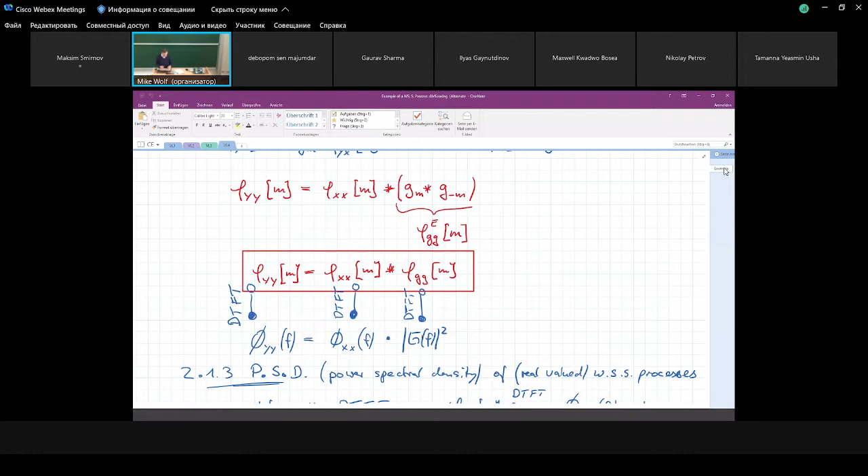And then we said, okay, we just introduced here this power spectral density. For this example, AMI, I've done the discrete time Fourier transform of the autocorrelation function and obtained the power spectral density. Then we discussed the characteristics.

And today we switch to discrete time stochastic processes. As long as these processes are real valued, there's no difference in the characteristics. So the autocorrelation function is an even function. This is very helpful because if you calculate the value at a given time shift m, you don't need to calculate this at -m if you know m, for instance. This value is always an even function. Of course, the autocorrelation function for real processes is real, and the power spectral density, because if this is a real function, the Fourier transform is always also an even function.

The difference is, of course, if you have discrete time signals, the Fourier transform is periodic. So it's not surprising that this is a periodic function. And of course, if you just insert numbers to obtain a frequency description, here you can't see any time, the time index m, or any frequency.

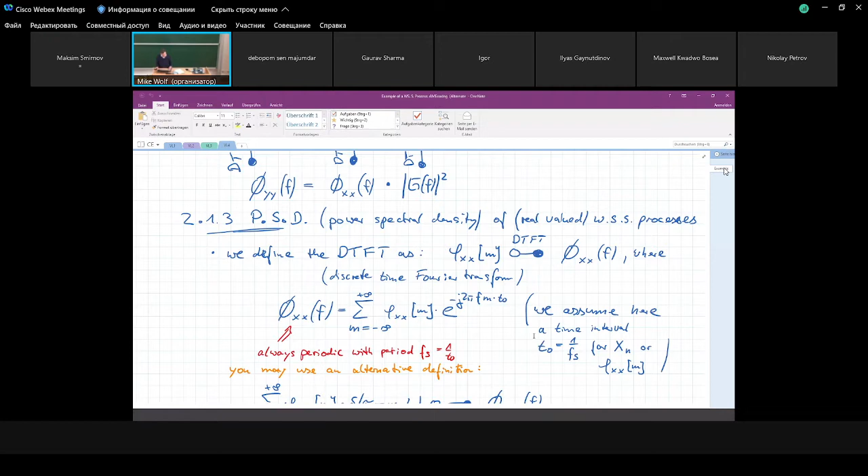Often you don't see this t-naught here, or the fs term. If you say, for instance, fs is 1, then this is just 1. But it's important to note that this point always corresponds to the Nyquist frequency, half of the sampling frequency. If you know the spectrum from 0 to the Nyquist frequency, you know everything, because this is an even function, and the rest is periodic.

So in MATLAB, for instance, if you have a discrete time signal and obtain the Fourier transform, usually you plot it only from 0 to half, so to the Nyquist frequency, because all the information is there, since we've shown that the spectrum is periodic.

So the total power is basically contained there, but you have to take care: the total power is not the integral over the power spectral density from minus infinity to plus infinity, because this would correspond to an infinite value. This would be possible, by the way, if we replaced this discrete time autocorrelation function with a sampled autocorrelation function using delta pulses.

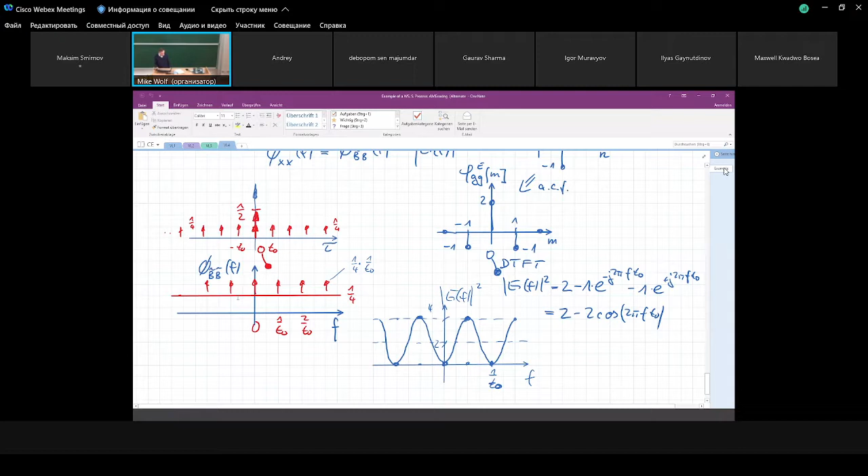So we learned already that if we know the power spectral density or autocorrelation function at the input, and the system description, the impulse response or transfer function, we know also the power spectral density at the output. We ended up with this example: how could we obtain this alternate mark inversion? We said we could do differential encoding of the bits and then take the difference of two neighboring bits. We started with this example last lecture.

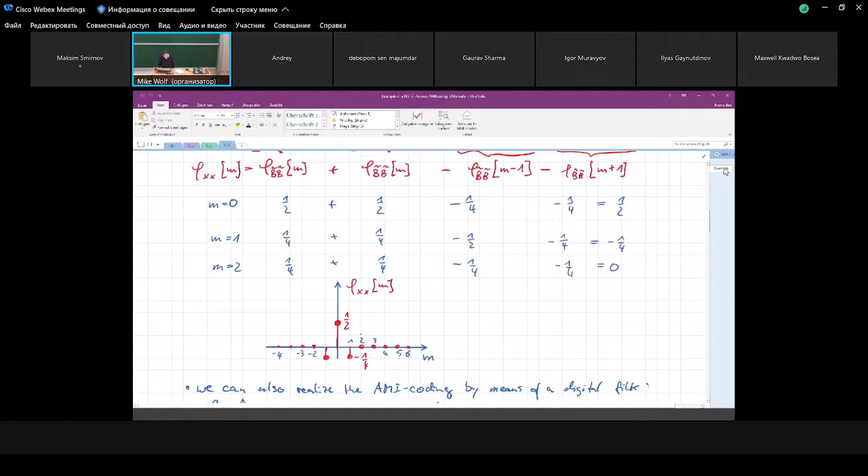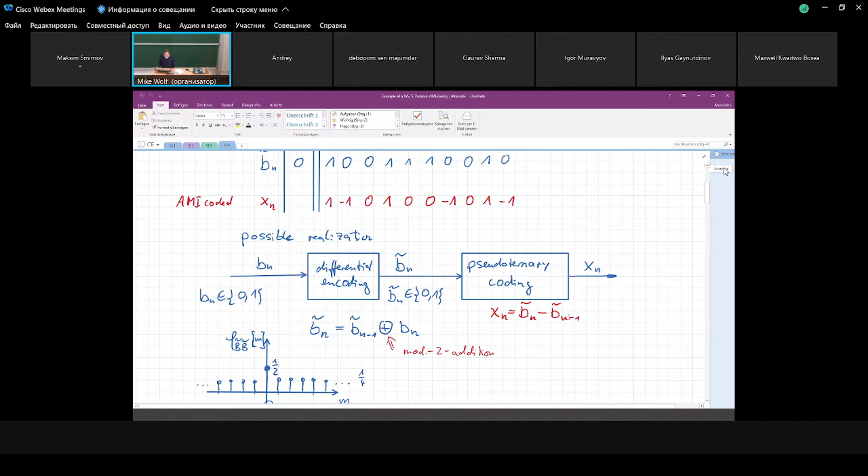There was this description: these are the differentially encoded bits, and this can be realized by a filter. I take the actual differentially encoded bit and subtract the previous one to obtain a new symbol, xn. So this is a filter, realized as such, and the impulse response, or correlation function, of this filter would look like this.

This is the filter impulse response. If I multiply Gn with Gn plus m and sum up, I end up with this for different m values, so an even function.

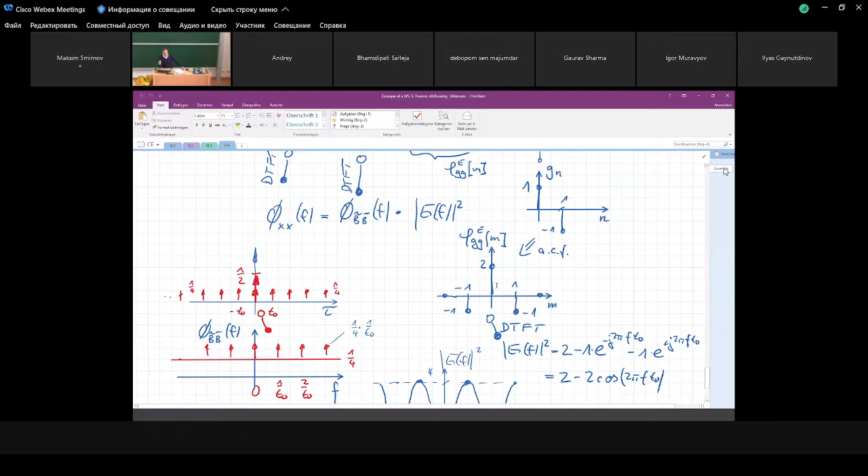So this autocorrelation function of the differentially encoded signal gives me the correlation function of AMI, but here we talk about power spectral density. So I could say this corresponds in the frequency domain to this G of f magnitude squared, which looks like this. And if I multiply this with the power spectral density at the input of this filter, I get the power spectral density of the AMI signal.

If you only take a look at the continuous part, it's a constant, since bits are statistically independent. But if I multiply this by the transfer function, I get again this sine squared characteristic, described by this filtering. The discrete components of the spectrum disappear completely because they correspond exactly to the zero crossings of this transfer function.

You see, if you multiply this with this, you get exactly the power spectral density which we obtained in this example from the correlation function. But here we said: take the power spectral density, multiply it with G of f squared, and we obtain the spectral density at the output.

So now we want to discuss why we can interpret the power spectral density as the spectral distribution of the power. Why is this possible? With our knowledge we can prove this. I'll show you, this is not a proof in the classical sense, but an example, you will see.

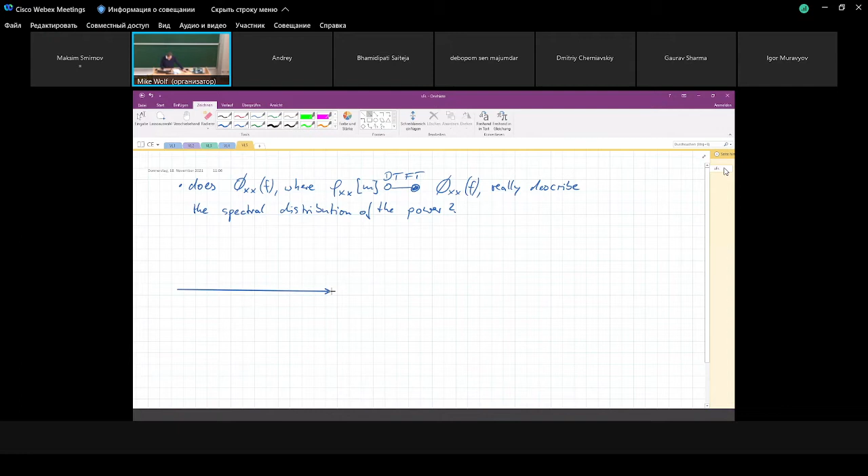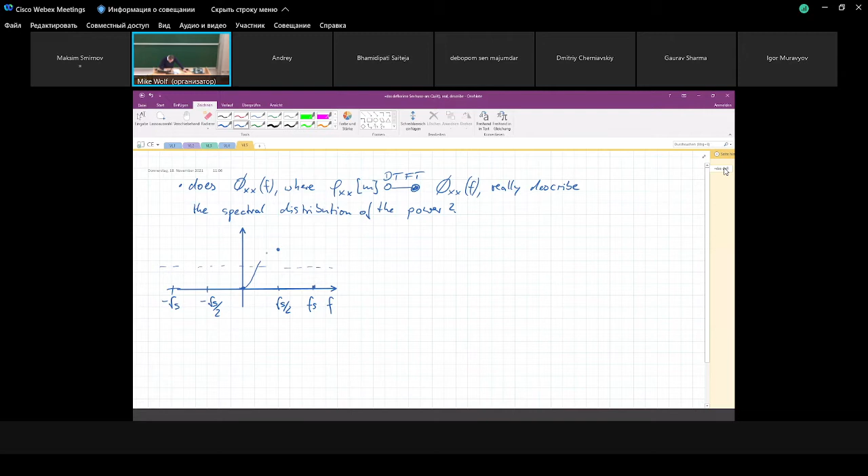Let's take a look at this example, though it could be any example, just to show where this power spectral density looks similar to the power spectral density of interest. Let's say here is the frequency, the sampling frequency fs, here is fs by 2, and here is minus fs. It has a sine-squared characteristic, so at 0 the spectrum had its minimum value, like an offset for sine. So on -- this is exactly the old example.

Then we said, if we just want to see the total power, we have to consider this area -- this is the total area, corresponding to the total power. But it's not just this area; you have to divide this area by fs. The advantage of using unitless frequencies is that you don't need this normalization. This would be the total power.

Maybe I'll write this again: for m equal to 0, you know that for stationary processes the autocorrelation function for a time shift of 0 is a constant, so it does not depend on n. And this would be just 1 over fs times the integral from minus fs by 2 to fs by 2 of phi x of f. For continuous time, you can just write the integral from minus infinity to plus infinity. So the total area under the power spectral density is the total power.

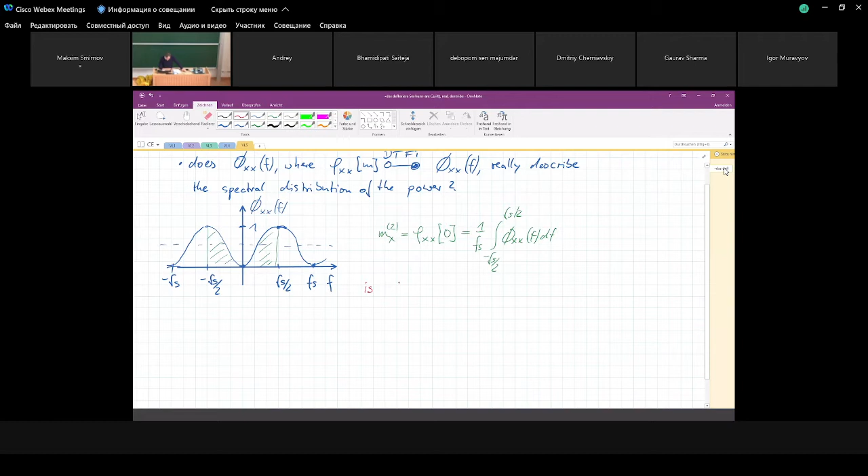Now ask the question: is phi x of f1 times delta f times 2... What is F1? This is a certain frequency, and we want to find the power contained around this frequency F1, not only exactly at this frequency, but in a frequency range which is narrowband, centered at F1. Let's say we have a small frequency range, and the width of this frequency range is delta F. So then we take a look at this area.

Now, take care: if you read a book or a paper and there's a power spectral density mentioned, you have to ask, is this two-sided, as in our case, or one-sided, as in physics, where quite often they present results that way.

Since it's two-sided, we have to consider the same at the left-hand side. So it's important, if you want to measure power at a frequency F1 within a certain bandwidth, because we use this two-sided description, we have to do the same at minus F1. This is the symmetry, because here we also have this delta F. So if phi xx at F1 is the power spectral density at this frequency, F1 times the spectral width times 2, divided by 1 by Fs, this is just a normalization which we require since we have discrete time.

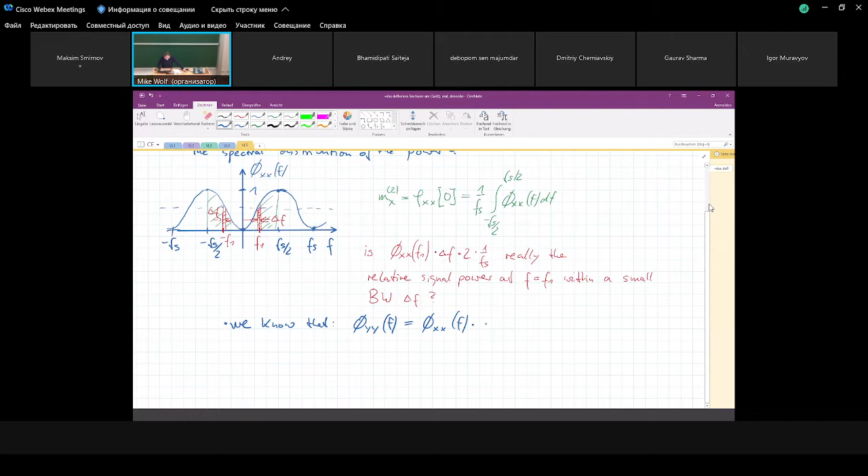To check this is quite easy, because we have shown that phi yy of F, the power spectral density at the output, is just the power spectral density at the input times the filter squared. Now we assume a bandpass filter with a very narrow passband of this delta F.

Assume a bandpass filter, a band filter, as shown in the figure. We are only interested in this, so let's draw a figure.

Let's say I draw it in red. Here we have exactly this frequency F1, and exactly this frequency minus F1. This is G squared. Assume such an ideal bandpass filter with a brick wall or rectangular shaped passband characteristic. Here, F1, so the frequencies within this bandwidth delta F pass through. This is the passband. All other frequencies, in a technical sense, are suppressed completely. This is a bandpass filter.

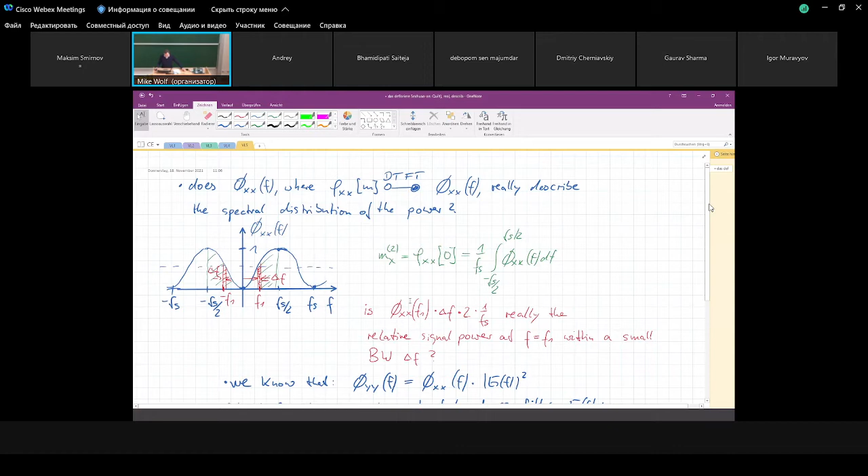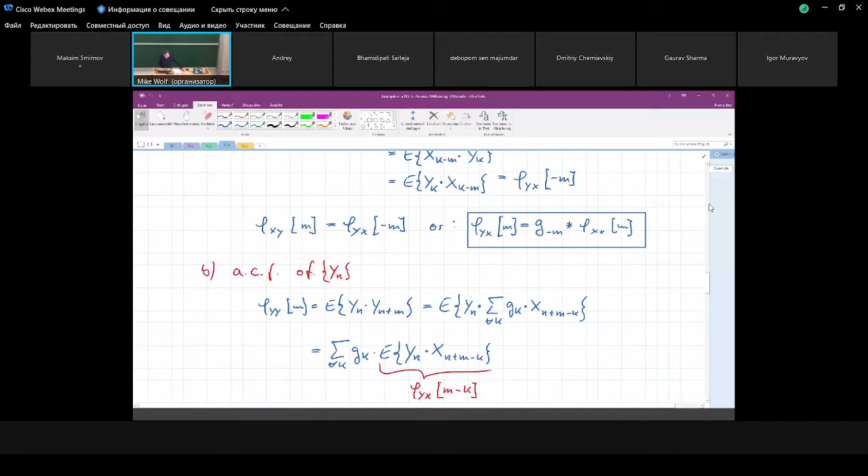So if you want to... this was the lecture from last week. If you want to measure this, you say, okay, here I have a quite long realization of my process, but only a single realization. I do only one source, which generates this coded data, AMI coded data.

I don't need a huge number of these signal generators operating at the same temperature, under the same conditions. That's one. Then I have here a bandpass filter.

And of course, if I want to find the power spectral density of this signal, I use this bandpass filter, and I change the center frequency, and then I measure the average power in this small frequency range. Of course, if I decrease the width delta f, we discussed before, we get a more precise description, but we need to wait longer in order to find a good measure of this mean power.

But you don't need to build this equipment ten times, you just have one realization, and you measure, you do the averaging over time. For instance, this AMI coded process is an ergodic process, a wide sense stationary ergodic process.

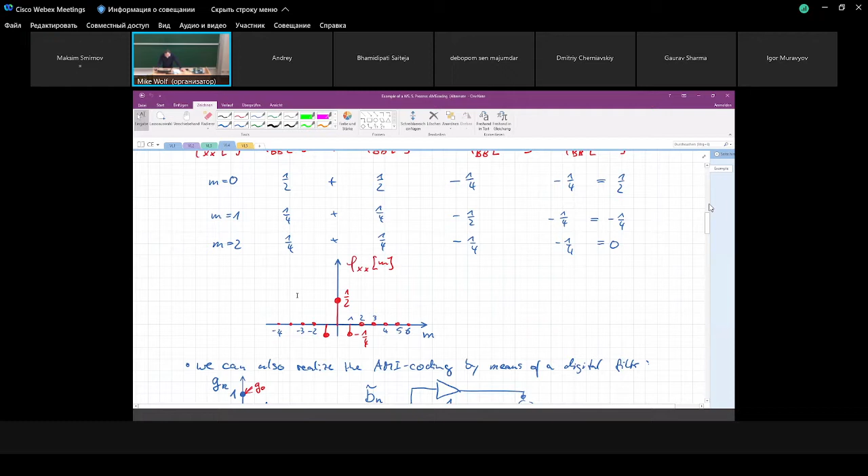Why? It's simple to understand. This AMI coding could be done by putting differentially encoded bits at the input, and the model is that we assume they are statistically independent and identically distributed. They always have a probability of 1/2.

Then, if you switch from one bit to another bit or excerpt of this signal, the surprise in the new bit is the same as if you use a different data source, because they are statistically independent. So if you have statistically independent symbols, the process is always ergodic, and if you do filtering, it's still ergodic.

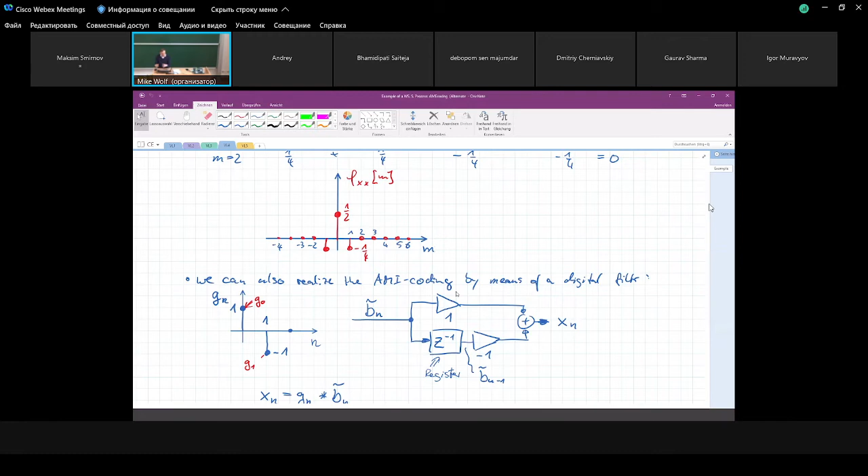So you could switch from ensemble averaging, which is always assumed if you write expected value, to time domain averaging in practice, to obtain something, to measure something.

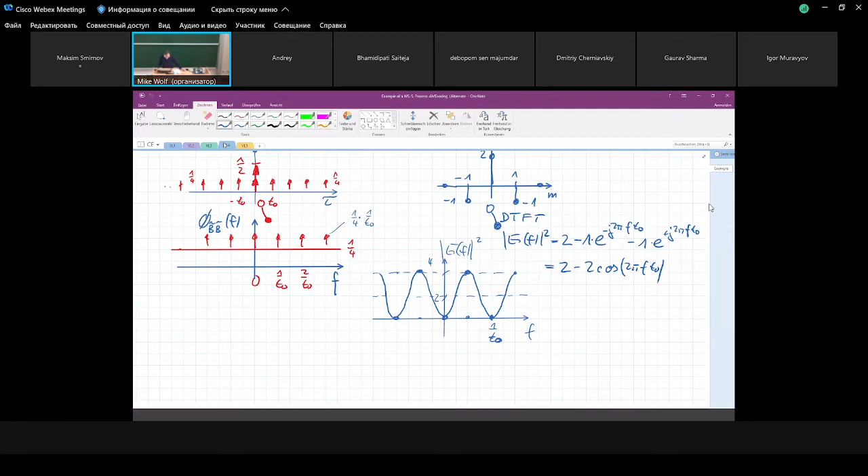Now, a last thing we'll find this topic especially important, to find a good way to discuss the power spectral density of modulated signals. But I introduce this here because it's, say, not very easy to understand - this is cyclostationary processes. So I just have to take a look at which...

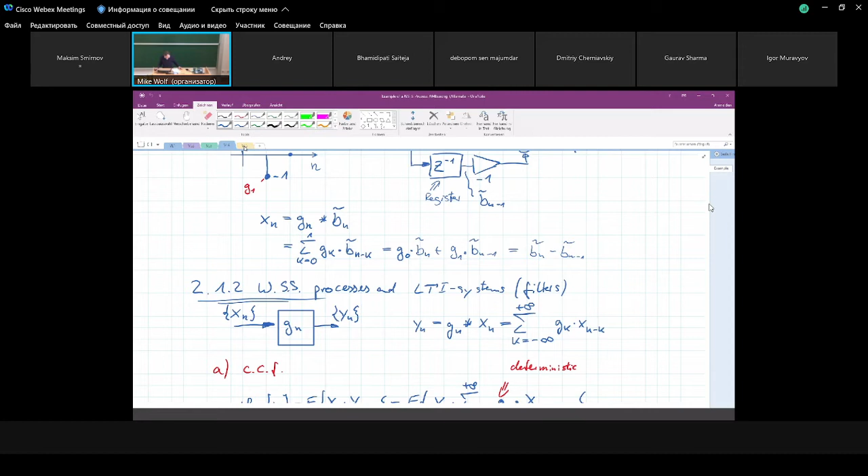1 second. This would be 2, 3. So this is 3.

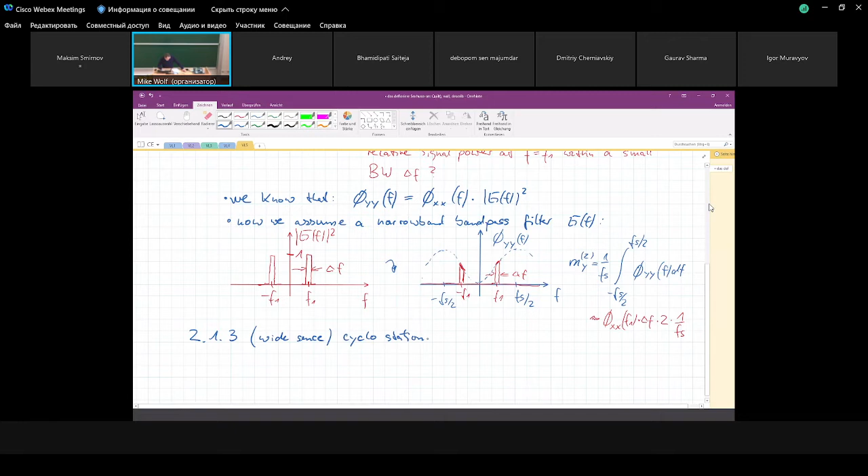Okay, to take care, I write here again: wide sense cyclostationary processes. This is a weaker form of wide sense stationary processes, and these processes have an autocorrelation function that depends on the time, but periodically - time is now a time index for discrete time processes.

But it is periodic. We start with a very simple example, and argue at the end, as you will see.

Say, according to our model, the process is, let's say, this cyclostationary. But we can derive from this model another model where the process is stationary, as you will see, at least wide sense stationary - interested in higher order descriptions. To understand this, I present a simple example. Then you will see that this cyclostationarity of a source really depends on our assumptions, on our models.

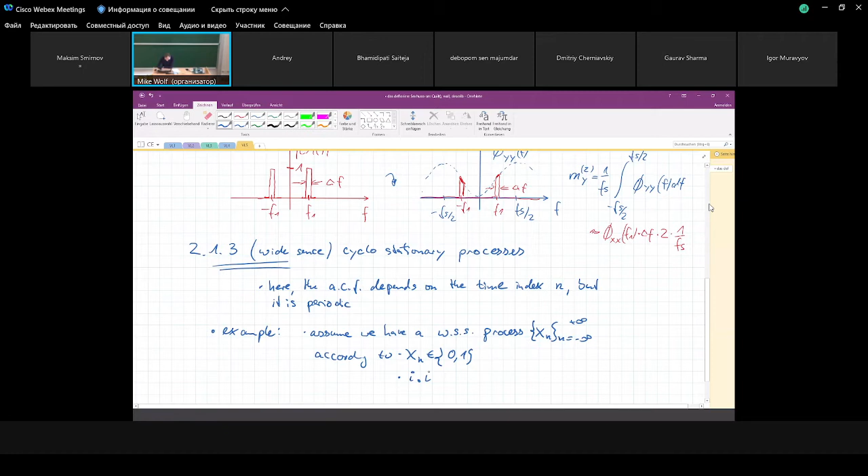Example: assume we have a wide sense stationary process, and so to say it's a process, I write here n from minus infinity to plus infinity, and we just write according to the x_n's, neighboring x_n are identically distributed. So I just write it here: independent, identically distributed. This is what we assume.

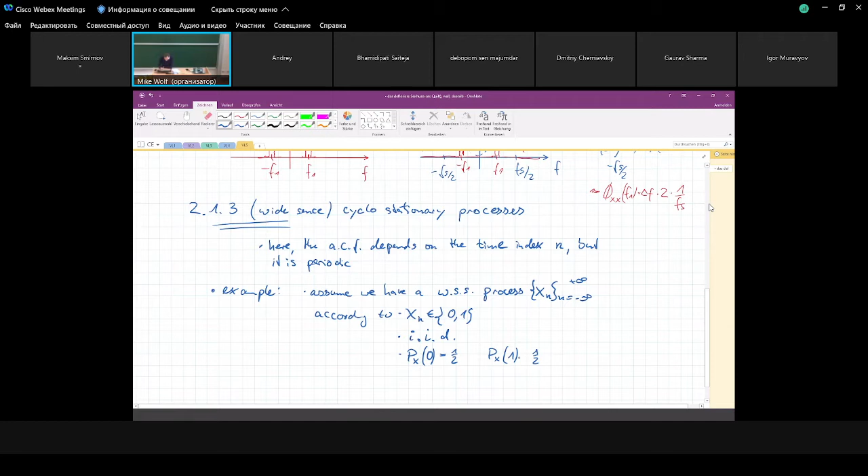And we assume, in this example, that P_x - I don't need an index here because they all have the same distribution - P_x of 0 is 1/2, and of 1 this is also 1/2. So ones and zeros have the same probability. Now I just draw an excerpt of this wide sense stationary and also wide sense ergodic, completely ergodic process.

It could look like this, and you will see later why I draw this. So I have a certain index, this is the time index n. Let's just draw here one realization. Start at, here is 0, n equal to 0. Let's say 1, 2, 3, minus 1, minus 2, and so on. It's just an excerpt, of course. I draw in the values.

Let's say this value could be, for instance, 1. This value could be 0. The time index is an integer, since discrete time processes are indexed by integer values. Let's say this is again 1 and this is 0. Here is also 1, 0, and this is 1. As I said, this is an excerpt. If we would build a short time average, it does not need to be 1/2, so just show it like this. So this is 1, and the values are 0 or 1.

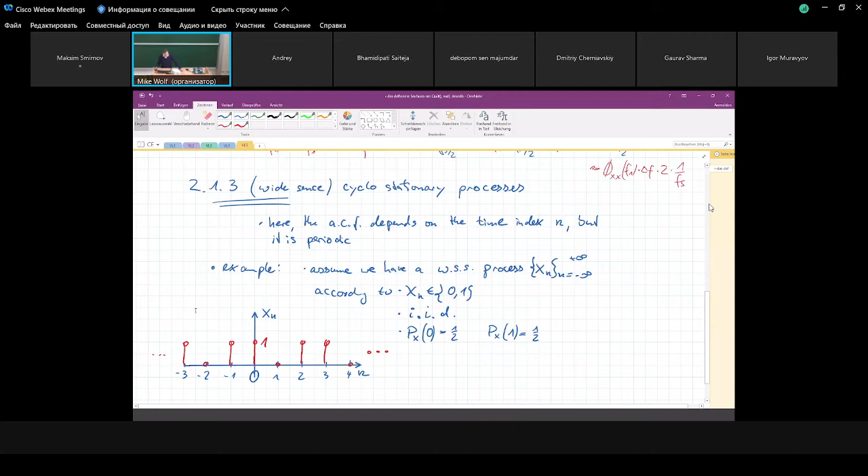This is one realization. So now, to obtain the autocorrelation function for this wide-sense stationary process, you know this is simple to obtain. Let me switch to blue. It looks like this, say this and this, this. So the correlation function, what does it look like? You should know it now. We take a look at the time shift m, and draw here phi xx of... the simplest case,

is to start with the value at m equal to 0, and this is the mean power always. What is the mean power? 1 squared is 1, 0 squared is 0, which is just 1/2. So you see this value here, say it's 1/2, I wrote in blue.

So, how can we obtain the other values? Neighboring samples here are statistically independent. Therefore, all the other values are just the square of the mean value. Square of the mean value is 1/4. Even if we obtained this over an infinitely long time interval, we could obtain it also by ensemble average. We just assume we know the statistics. So the mean is 1/2, so the mean power is 1/4. So this value is just 1/4 for all the other m's. This is just how our autocorrelation function looks like.

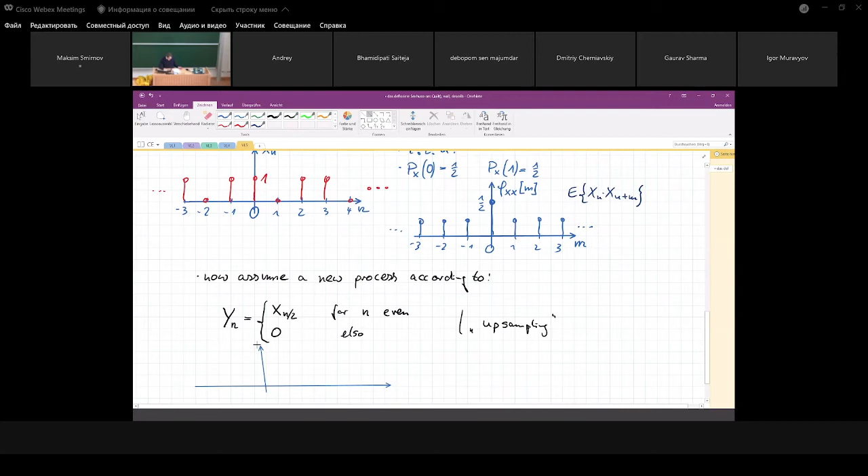This is this value, but now we have new values. I try to use a similar color, should be the same color. I do it with the same color, but a little bit thick. These are the new values. Append each original value with a 0. Quite simple. So this is the new realization, yn. It's like this.

Now let's say all the realizations are defined like this. Then we take a look, for instance, at the expected value. Now I take a look at the concrete time n. This is always the operator for ensemble averaging, so we have a number of realizations. This is one realization, but I draw figures of thousands of other realizations from different sources, which look different, at least at the numbers of this n. Because now if I start at 0, I want to take a look at the average power at the time 0.

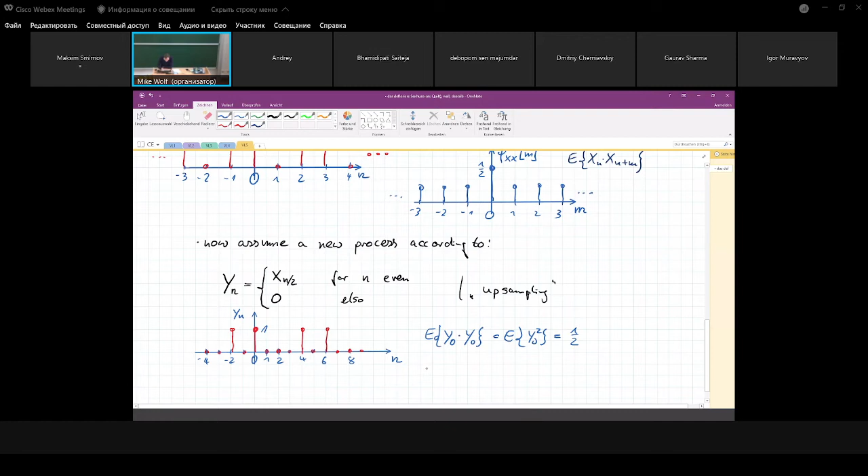What do we obtain? If I just take a look here at time 0, but I assume there are thousands of realizations, and all the realizations come from different sources, so they are statistically independent. So what is this value? This is 1, of course. It's what? Like in the previous one, it's 1/2, of course. Half of the cases I have this value, described by this probability, and half the time I have a 0. But now I take a look at expected value of y1 squared.

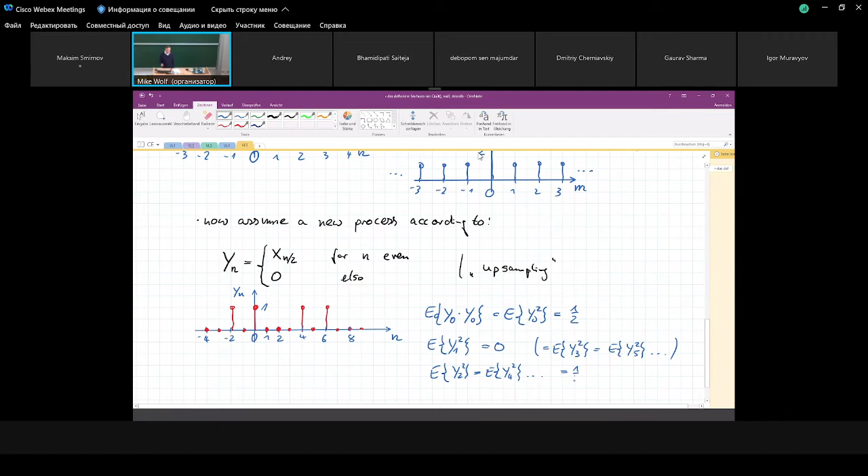Now I take a look here, where I always insert the 0. And what is the value? 0. So at time 1, we see the expected value depends on the time. And we could say this is the same as the expected value of y3 squared, to the expected value of y5 squared, and so on. So we see even the mean power depends on the time index. But we also see that the expected value of y2 is equal to the expected value of y4, and so on squared. So at odd numbers of this time index we always get this power 0, because we have done this upsampling where we inserted the 0. It's this constant power of 1/2.

So you see, at least if you take a look at this mean power, we have a period of 2. Even now, if we would investigate the autocorrelation function for different time shifts, we get a periodic structure. So the autocorrelation function becomes periodic over the time - I don't mean periodic over the time shift, this is important. So we write the expected value of yn times yn plus m. This is our autocorrelation function. And also the expected value of yn, so the first moment, depends - because there are two such things - on the time index n. But both values are periodic, with a period of 2.

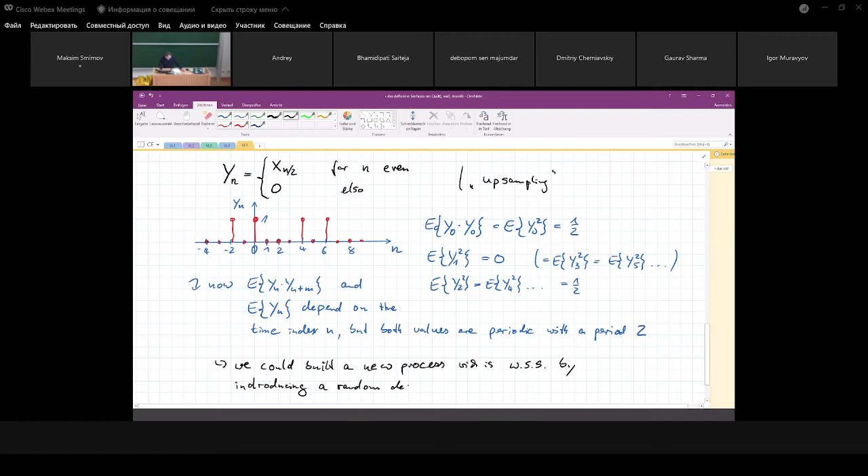It's not unrealistic. So whether this process is stationary or not somehow depends on our model. So we could say, okay, this process is wide-sense stationary by introducing a time delay - you could insert any time delay, but it's enough between 0 and 1 - to the process, to the realizations.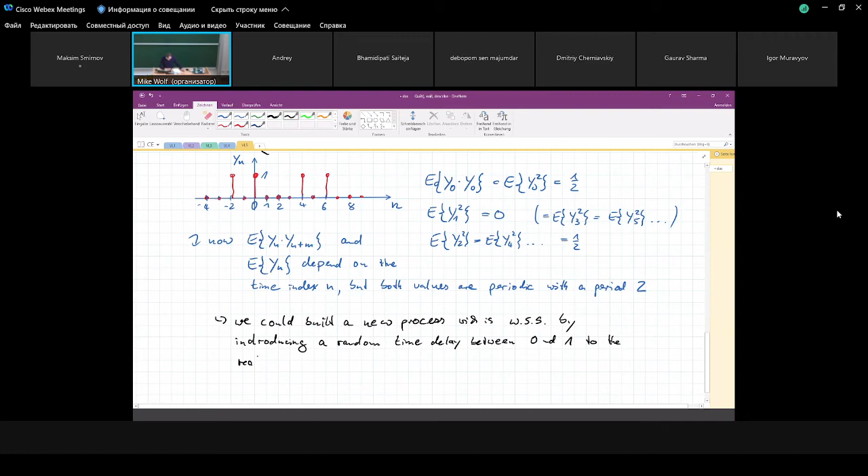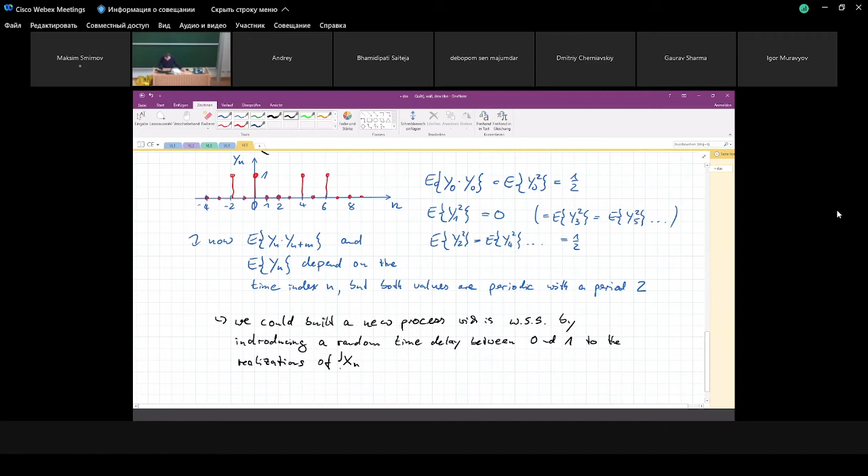So let's say I build a new process, Zn. Values of Zn are Xn plus theta or so. This theta is equally distributed between 0 and 1 - it's a time shift. This technique has a name: it's denoted as phase randomizing.

Why phase and not time shift? If you have a sinusoidal wave and you introduce a time shift, this corresponds to a phase. Probably that's the reason for the name, but in the literature this is denoted as phase randomizing.

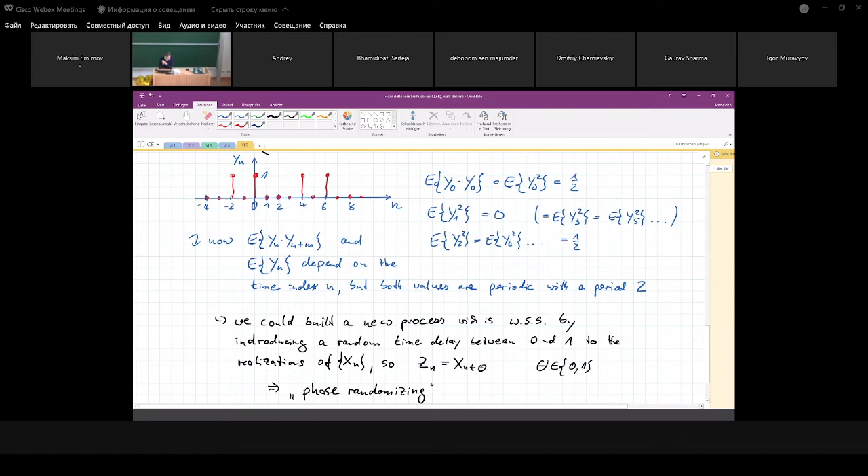What we obtain is that the autocorrelation function of Z looks like the time averaged autocorrelation function of this cyclostationary process. Basically, if you introduce this random delay, you get the same result as if you do a time averaging over this time-dependent autocorrelation function. Now let's look here.

Let's say we only look at the second moment. The second moment is either 1/2 or 0 in this original cyclostationary process. So this means the mean value is just 1/2 plus 0 divided by 2, which is 1/4. This is not astonishing - even if you take a time domain average, statistically the original data bits are half of the time 1 and half of the time 0. But I insert a 0 after each bit, so now the new second moment is 1/4.

So what about the other values of the autocorrelation function? Of course, for even time shifts they are not 1/4, they are 1/8. So we could say basically that the autocorrelation function - I'll show you another example - of Zn at M equals the time averaged autocorrelation function.

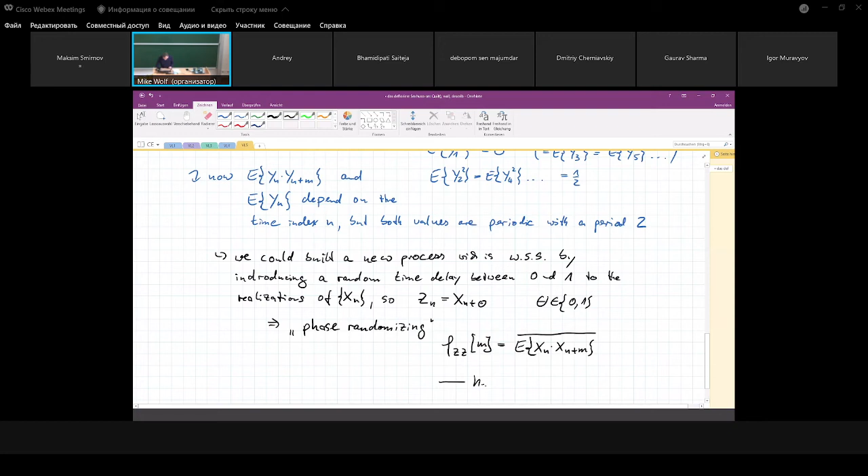So I could say this means time averaging - here we only need to do this over 2 samples of the autocorrelation function. Sorry, y, of course - this was a mistake, sorry.

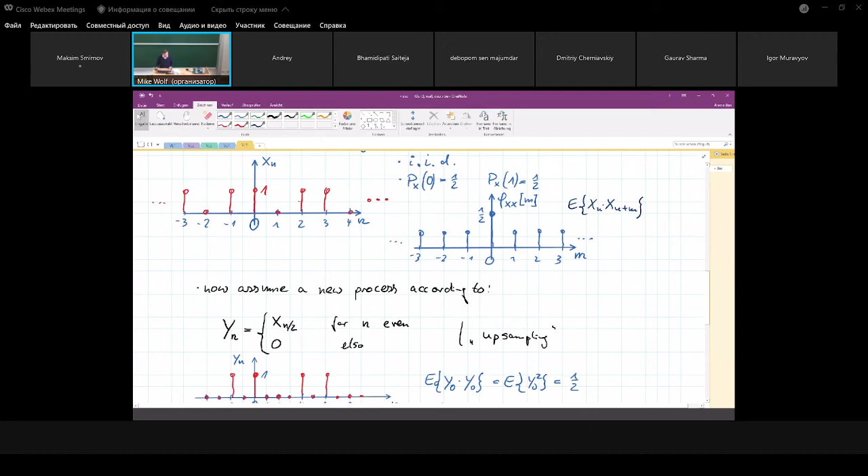I said the original stationary process was x, and the cyclostationary process was y. So of course I need to write y here - this was my mistake. I was talking about the cyclostationary process, of course. Yeah, this was really a mistake here.

So the new autocorrelation function is periodic. If we time average over one period, it's exactly as if we would introduce random delay sessions, which, in my opinion, is often closer to reality than the original.

The way I just mentioned this, I don't write it down. You could expand this technique.

Say in the extreme case, let's say I have a periodic signal, assume a sinusoidal wave. Hopefully you know from the seminars that the autocorrelation function of a deterministic signal is just periodic. For instance, the autocorrelation function of a sine is a cosine, always with the same frequency. Cosine shaped autocorrelation function.

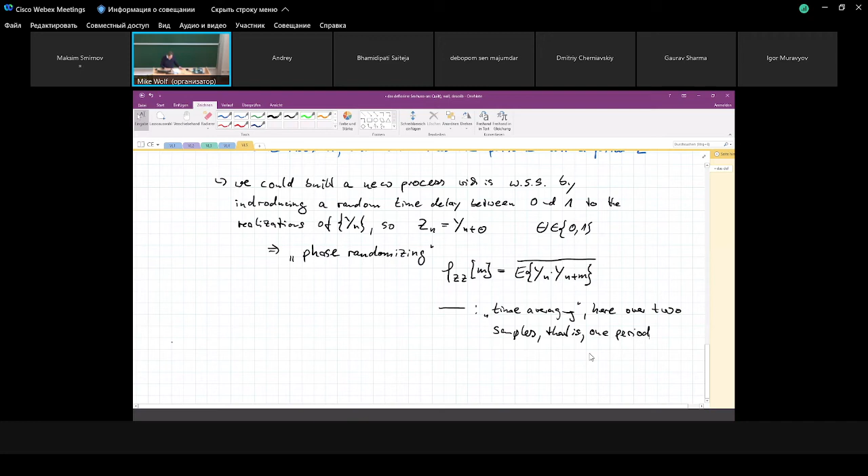So I just draw a figure, but then I delete it, just to say, let's say we have a sine wave here. The next realization is the same sine wave. All the realizations are like this sine wave.

But now, if I introduce random time shifts for the sine waves, which are uniformly distributed according to the period of this sine wave, all the realizations have different delays. And then I could map this deterministic, and for sure not stationary, process into a wide-sense stationary process.

But we get exactly the same ensemble average as if I would do the time averaging as described in the seminar.

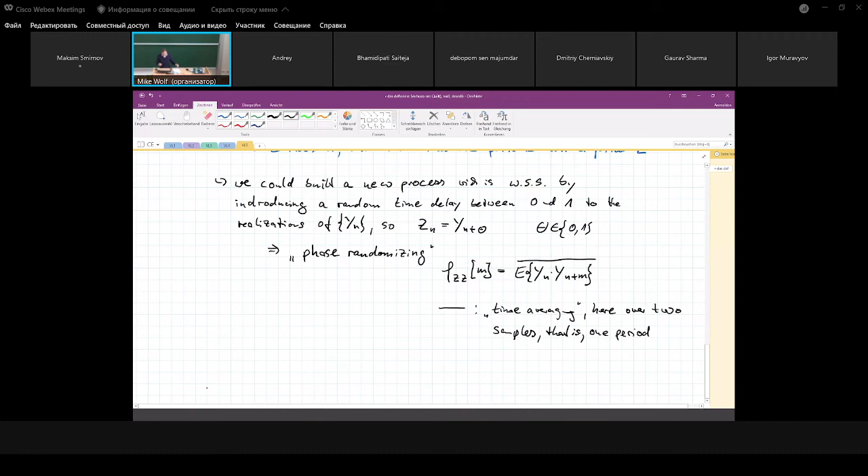That's the story behind it. Now I show you an example which you can find on the slides. So, the slides - I have to go to the web.

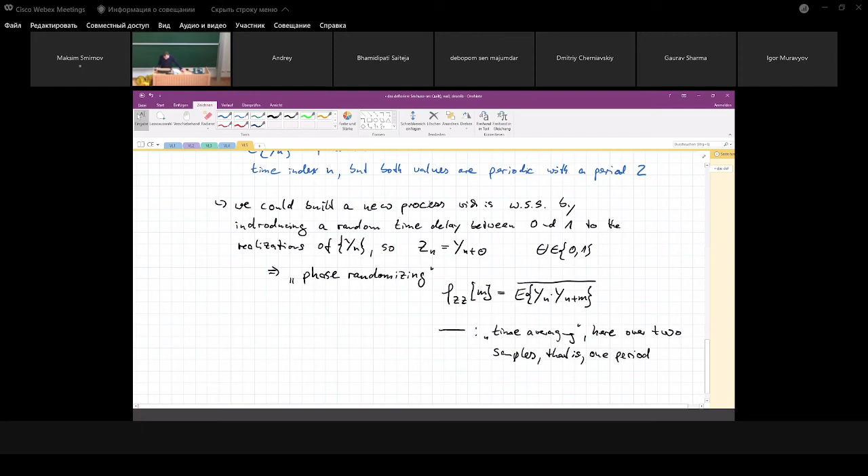Now, we could build a new process which is wide-sense stationary. So, sorry, now you could read it. I switch to the slides.

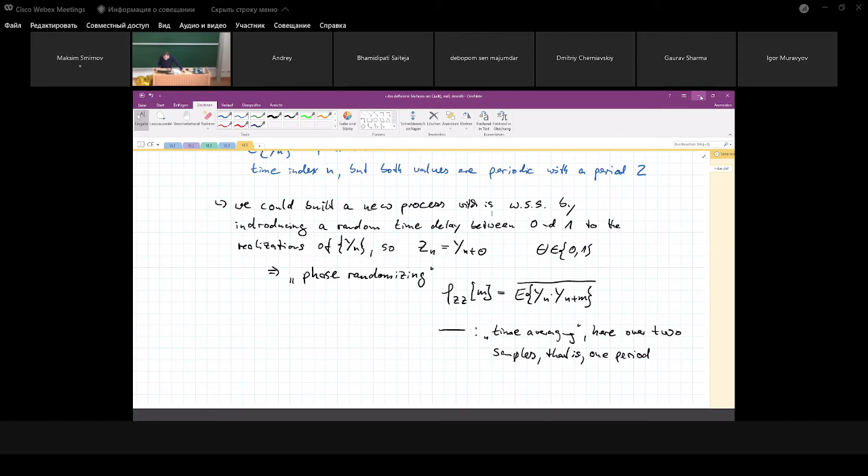Just say we could use - I mean, we have a non-random process, a non-random signal. Okay, it's a periodic sinusoidal signal. But we could say we could map this into a random stationary process if we introduce randomness to the realizations.

So basically the random thing is just this random delay. And then I just say sample averaging gives exactly the same autocorrelation function value as time domain averaging. This is quite similar to what we are doing.

So now we go to the communications engineering example. Take a look at the slides here.

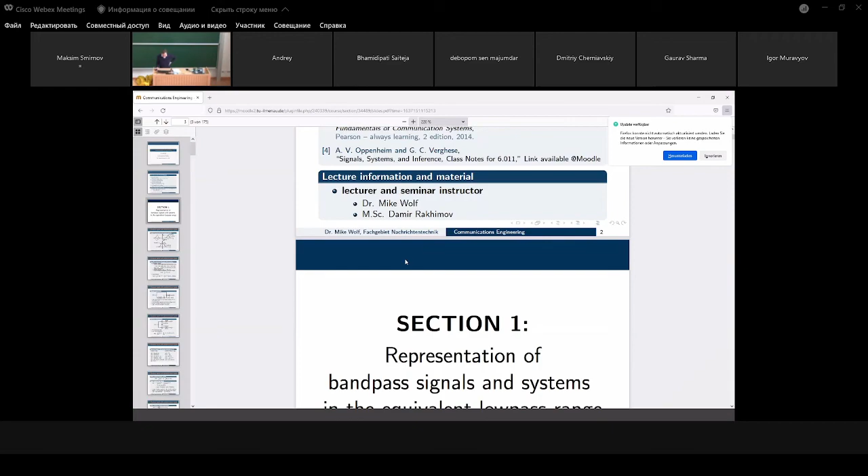It's an example which is so-called Manchester coding. Understand what happens exactly here - it's Manchester coding, which is a cyclostationary process, at least wide-sense cyclostationary. So say we want to transmit a bit stream.

These are the original bits. Here the time index is k, because for the coded bits I use a different time index, which is n.

So these are the coded bits, and this Manchester encoding is quite simple. If I want to transmit a binary 1, I transmit 1, 0. If I transmit a 0 originally, I encode this as 0, 1. So each 1 is mapped into 1, 0, and each 0 is mapped into 0, 1.

So this is not channel coding - this is denoted as line coding, because we want to change the spectral density of our discrete time signal. We want to remove DC components, at least the continuous part of the spectrum, at f equal to 0.

Why do we need to do this in some cases? If you have a real source and you want to transmit data, it could happen that a lot of adjacent data bits are just 1, or a lot of adjacent data bits are just 0, and you transmit this over a channel with high-pass characteristic.

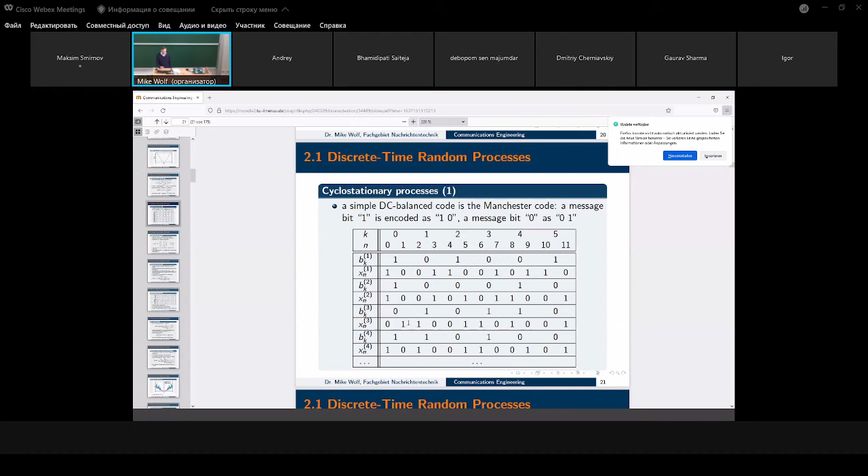But if I compare x1 with x2, this is still the time shift 1, of course there is a value, because now I take a look at two different code words. This is the second bit of the first code word, and this is the first bit of the next code word. Statistically, in one of 4 cases, the first code word will end up with a 1, and the next code word will start with a 1. So in 1 by 4 of all cases, I get 1 times 1.

Therefore, if we take a look at the autocorrelation function, at m equal to 0, it does not depend on the time n. The value is just the 1/2 function. But if the time index is an even number, the correlation function for m equal to 1 is always 0. But if I switch to an odd number for the time index, the autocorrelation function is 1 by 4, because in 1 by 4 of all cases, one code word ends with a 1 and the next starts with a 1.

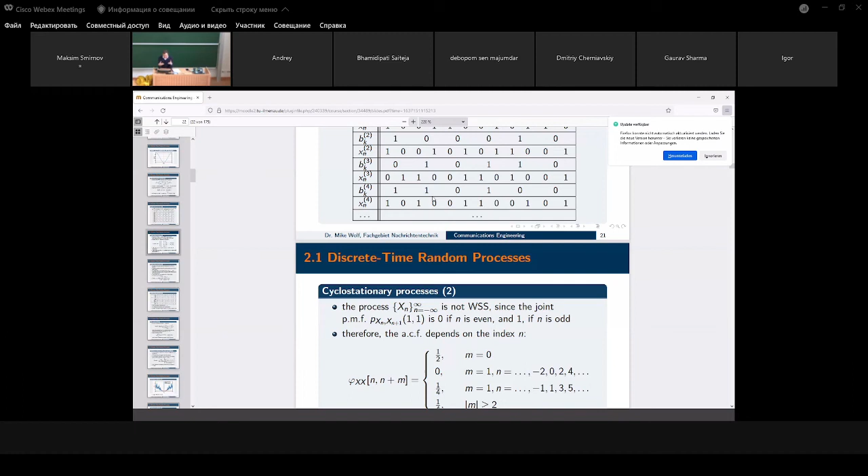And then for larger time shifts, I always look in 2 different code words. The statistic of two 1s is, of course, 1 by 4.

Now, in order to see that, let's ask the question: is this scheme good for transmission? How could I obtain this? Now I have this autocorrelation function that depends on the time. How can I obtain a power spectral density? Okay, say I just do it over time domain averaging, but is this allowed? Because this process is not stationary, but this just depends again on our model.

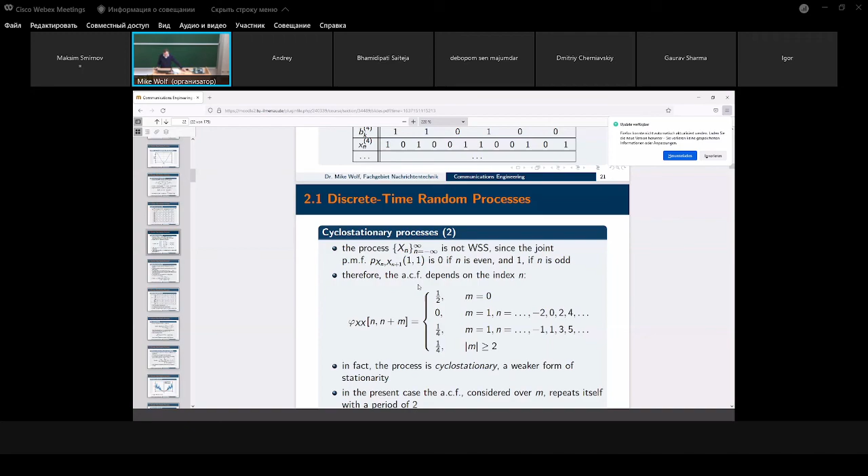Now, what would happen if we do the ensemble averaging? If we only take a look at the realizations which have this delay of 0, I get the original problem—I calculate the autocorrelation function at n equal to 0, with a shift of 1, and I get this value of 0. But in the other half of the realizations, if I take a look at n equal to 0 and m equal to 1, since I shifted this, now I'm actually looking at, let's say, 1 and 2. This is the same as if I consider the autocorrelation function for half of the realizations at n equal to 1 and m equal to 1.

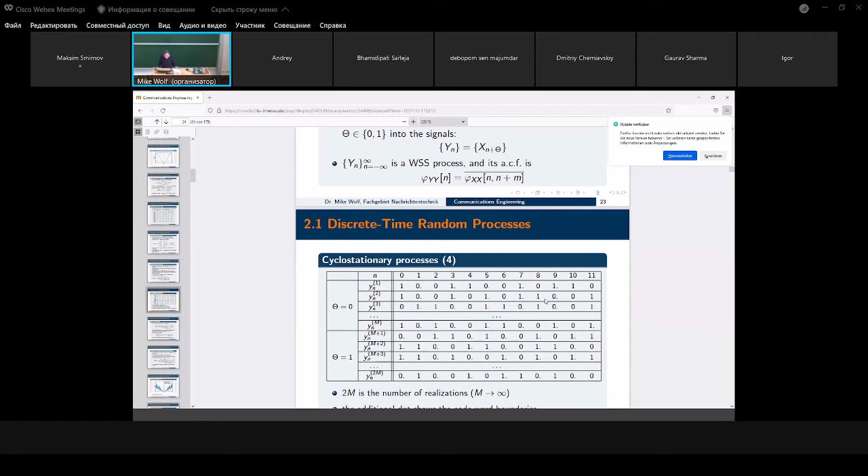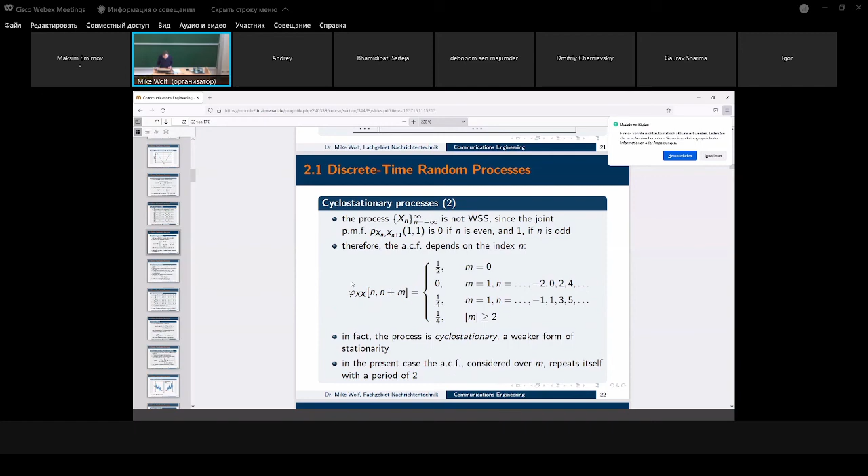This depends on the time. In the other half, I take a look at n equal to 1, or n equal to 3, and so on. If I average, take the average value, this is the same as if I average over the original autocorrelation function here for this process, which depends on the time. So I just need to do averaging over samples again to obtain the autocorrelation function of this case.

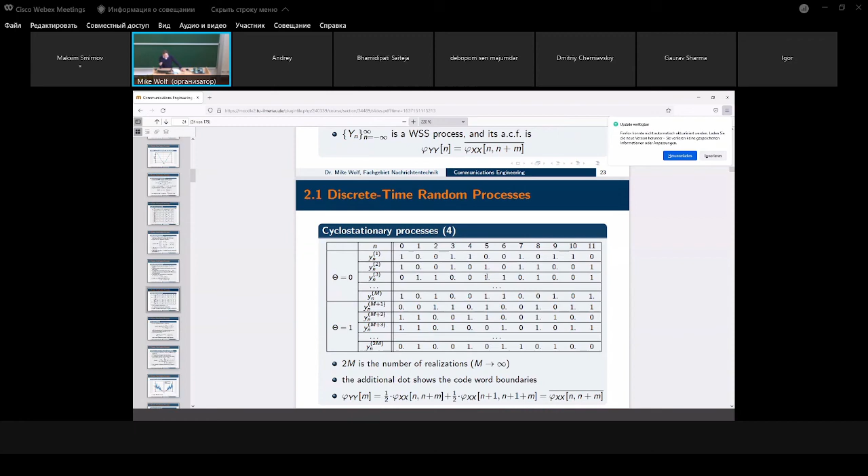So I just want to tell you, if it's simpler to obtain this autocorrelation function, I would say I can map this into a time-independent function, which corresponds to a random phase, just by averaging over the time. Then the value of the autocorrelation function here is 1/2, of course, at m equal to 0.

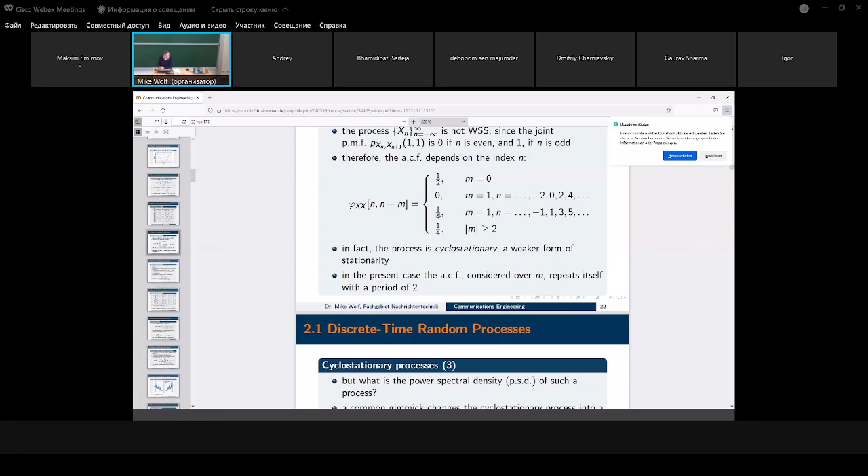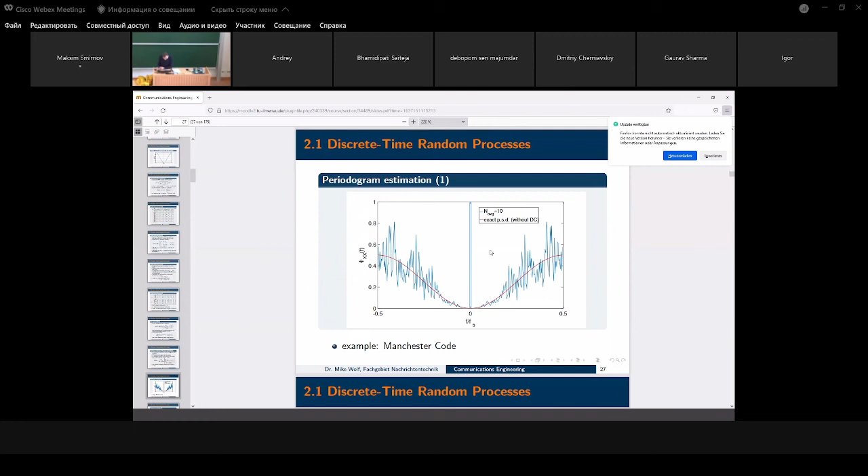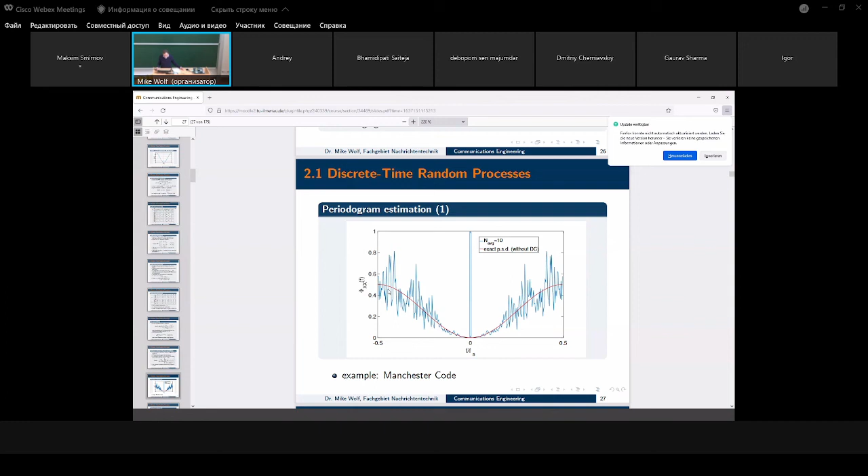So this was just a short aside. As I said, in the next lecture, we do this periodogram estimation. I just show you here a figure of how it looks like, this power spectral density of this Manchester coding.

What you see in blue is basically an estimation of this power spectral density, where the red line does not contain the DC component of the Manchester code, because there is a DC, of course. You only transmit zeros and ones, and therefore you have a Dirac delta pulse at f equal to 0, because there is a DC signal. This is what you see here in the simulation, but for this figure, I only draw the continuous part of the spectrum.

Transmit the ones as -1 and +1. Then you also make sure that your mean value of the signal for this AMI is basically 0, because if you transmit a 1, the next one is transmitted as a -1. So you ensure a balance of 0.

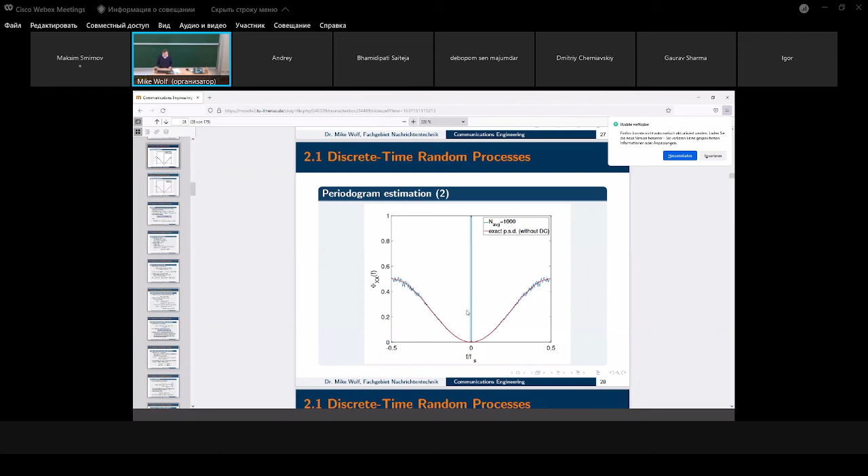Here you ensure a balance of 1/2. But this is quite often used, for instance, especially in fiber optics.

So now we switch to continuous time. There's not so much to say about continuous time. The difference is, discrete time processes are random variable sequences of random variables indexed by an integer number. This is the time index, n, say.

The index is a real value. This is the time t. We don't write x with a subscript t, we write x of t. But this is the meaning. So now we switch from integer-valued index to real index, and this is the time.

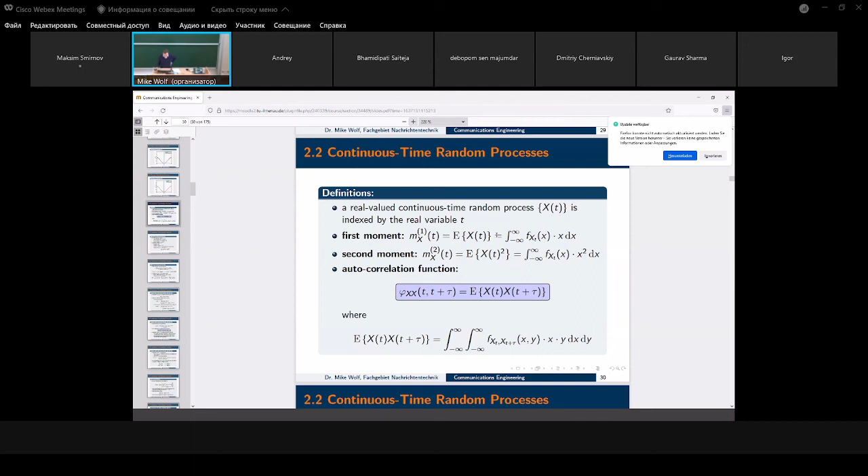Basically, the same definitions. We have the first moment. This expectation can be calculated. Say I consider all possible amplitudes at this time t. Because I calculate this, I consider all amplitudes and weight these amplitudes by the probability density at this time t.

This is the probability density function at the time t, as at the time index n. And don't make one mistake, please. Often we talked about discrete time processes. We used here the probability mass function instead of the probability density function, because we said we also have discrete amplitudes.

This is often the case. We talk about data sources, and they are 0, 1, or let's say 0, 1, 2, 3, or whatever. But you could also have continuous valued amplitude. Then you know that you need to switch from the probability mass function to the probability density function, because you have continuous amplitudes.

For continuous time signals, usually you have to use the probability density function. Assume that you have an analog signal, so it has all the possible amplitudes. This means this is the probability density function at the time. Then this is the second moment, of course, which may depend on the time.

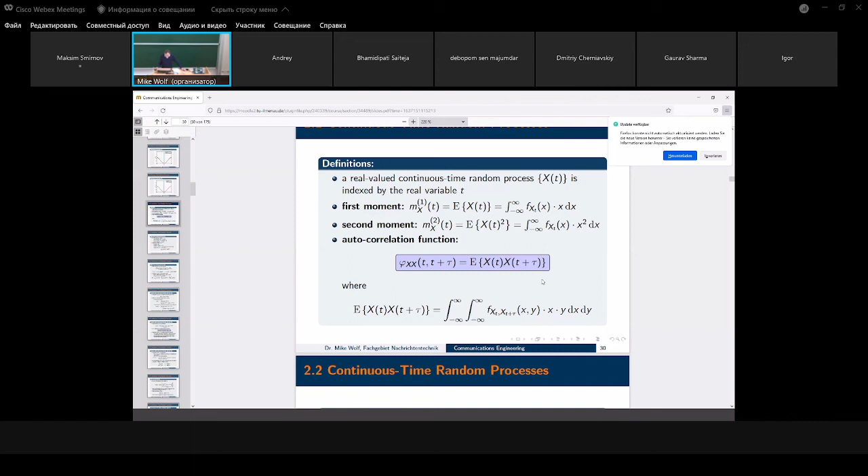This is the equation. Let's say if I started with this expression in a lecture on stochastic signals and processes, and I said this is the definition of the autocorrelation function, you would say you don't understand. But this means, again, this is the probability density function. Take a look at the statistics over a huge number of realizations. This is the statistic of x at time t. It describes the relative probability, a probability density function. Then we compare this to the probability density function at time t plus tau. This is a joint probability density function.

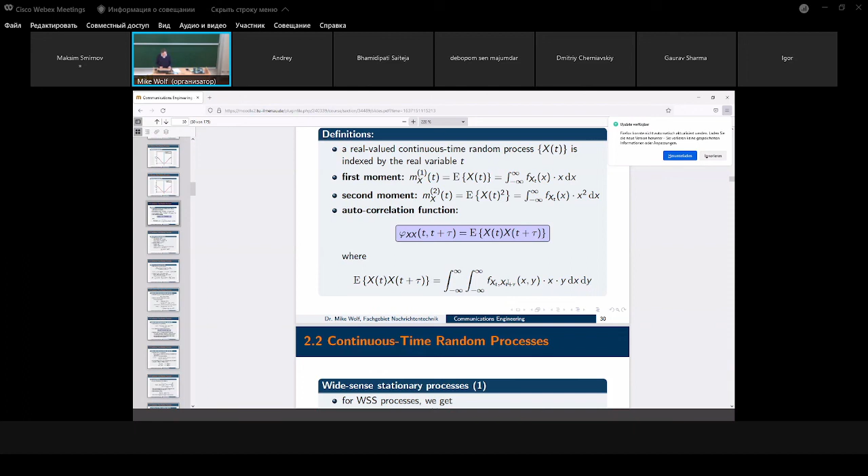Sometimes you see that they insert xt and yt here, but this is not important because this is just a given value of this joint probability density function. So this is the whole story basically. And again, we are interested in wide-sense stationary processes, where everything is independent of time t.

Then we have exactly the same properties as before, as long as we are assuming real valued processes. This is what we are still doing. Assume real valued processes, because then we get really nice and simple characteristics.

This is tau equal to 0, the average power, which is time independent, averaged over the realizations. This value is the largest value. The autocorrelation function for other taus cannot be larger than this value. It's an even function.

This is shown here. And we still know, if we take a look at large time shifts, we can assume that the random variable xt and the random variable xt plus tau are statistically independent. Therefore, for large tau, if there is a limit, this limit is just the mean value squared, as before.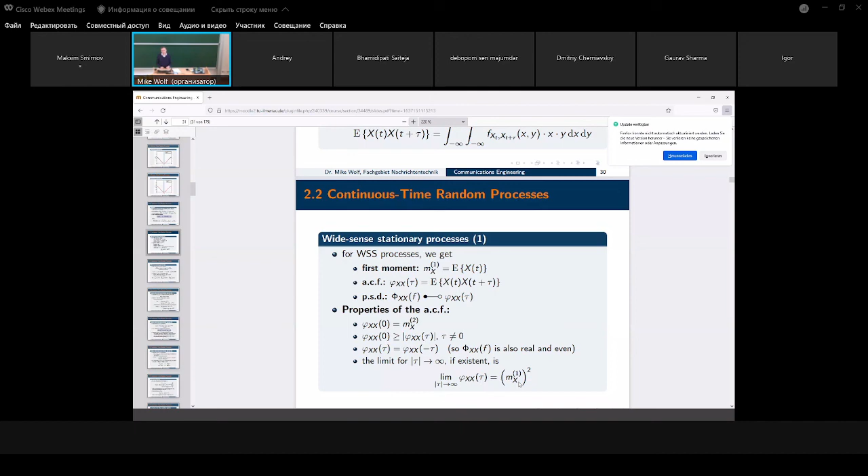You see the process after filtering is still wide-sense stationary. It does not depend on the time index, as you see in our derivations. The new autocorrelation function is the old autocorrelation function convolved with the impulse correlation function of the impulse response of the filter.

Even more important, in the frequency domain, the power spectral density at the output is the power spectral density at the input times G of f squared. Everything is the same. And here's an example, and I intended to do the description of so-called additive white Gaussian noise today, but now we have to shift this to the next lecture, no problem.

So we start with a very important example. This is a continuous time random process which describes an interference, and this is additive white Gaussian noise. Almost any transmission scheme suffers from this additive white Gaussian noise if the transmission distance is large.